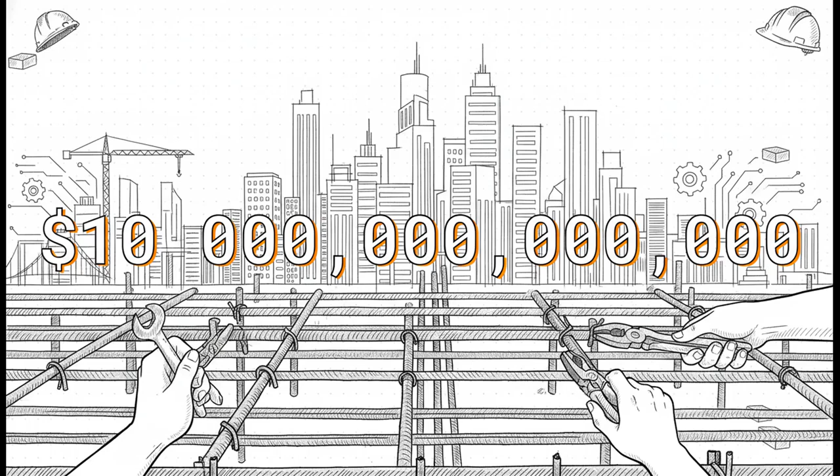$10 trillion. Let that sink in for a second. That is a 10 with 12 zeros right behind it. It's a staggering figure, and it represents the sheer, unbelievable scale of the global construction industry. It's a massive industry. Actually, scratch that. It's quite literally the foundation of our entire global economy.

But, when we look up at those towering skyscrapers or drive down endless highways, how often do we really stop to think about the micro details, the highly skilled hands that actually keep this giant macro economy standing upright? Well, let's dive into this explainer and uncover the highly specific trade that holds our entire built world together.

Today, we're looking way past the shiny glass facades and the smooth concrete walls. We're going to focus on the unsung heroes of this $10 trillion giant, the assistant bar benders and steel fixers. These are the specialized tradespeople manipulating the very steel that reinforces literally everything in modern human life.

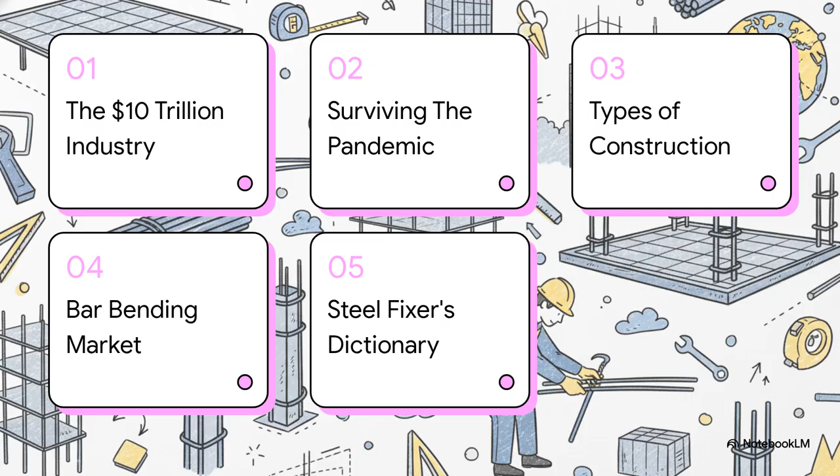All right, here's our roadmap for today. We'll be covering the $10 trillion industry, surviving the global pandemic, 3 types of construction, the bar bending market, and finally, we'll crack open the Steel Fixers Dictionary. Let's jump right in. Section 1, the $10 trillion industry.

So let's set the stakes here. Construction is an absolute heavyweight economic driver. Traditionally, it's a contracting sector, which means this massive global machine is actually made up of millions of smaller businesses and individual tradespeople all working together.

And nowhere on earth is this growth more electric right now than in India. Get this, India's construction market is expected to grow at a compound annual growth rate, or CAGR, of greater than 10% from 2022 to 2027. That is explosive, sustained growth happening right beneath our feet.

But to fuel that kind of relentless expansion, you need way more than just investment capital and raw materials. You need immense human capital. You need skilled hands to actually put the whole shebang together. Which brings us perfectly to this quote. Skilling is building a better India. If we have to move India towards development, then skill development should be our mission.

This really bridges the gap between the crazy economic scale of construction and the absolutely critical importance of individual vocational trades. You just cannot build a $10 trillion industry without prioritizing the folks doing the heavy lifting. And that quote comes directly from Sri Narendra Modi, the Prime Minister of India.

It brilliantly highlights how specialized vocational skills are viewed as the literal foundation of the country's future. It proves that skill development on the ground isn't just some corporate buzzword, it's a fundamental economic imperative for a growing nation. Section 2, Surviving the Global Pandemic.

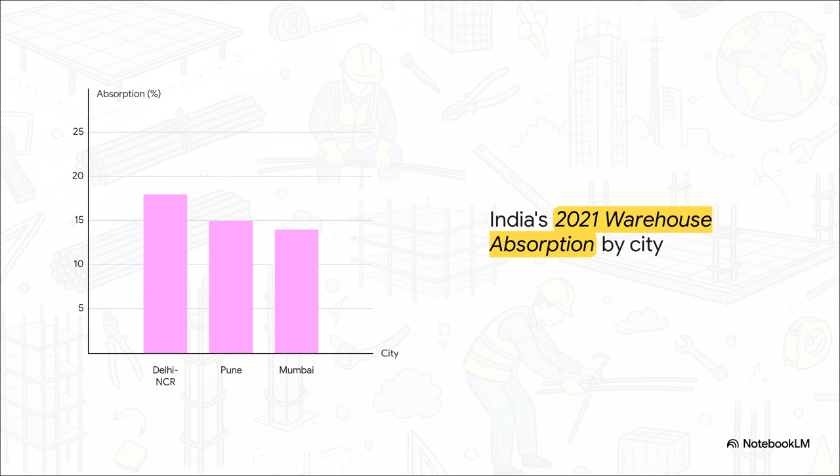So the industry didn't just survive, it rapidly pivoted to build the exact logistics infrastructure we needed to keep all our home deliveries running smoothly. Section 3, 3 types of construction.

Okay, so now that we've got the economics down, let's break this massive industry into 3 digestible categories. It really helps you mentally map the built environment you interact with every single day. First up, building construction. This is the one we all know best, residential and commercial projects. In fact, if you're sitting inside a house or an office building right now watching this explainer, you're literally inside this category. It covers everything from a simple bathroom remodel all the way up to commercial skyscrapers.

And a fun fact, while commercial buildings use complex high-tech strategies, good old-fashioned brick construction is still the most common technique for residential houses in India. Next, we have industrial construction. Now, this is a smaller slice of the overall pie, but it is highly complex.

We're talking petroleum plants, power generation facilities, chemical plants, heavy manufacturing hubs. This sector demands extreme precision and heavy machinery. You've got highly specialized teams of architects, civil engineers, and project managers working in perfect lockstep to make sure everything is both successful and safe.

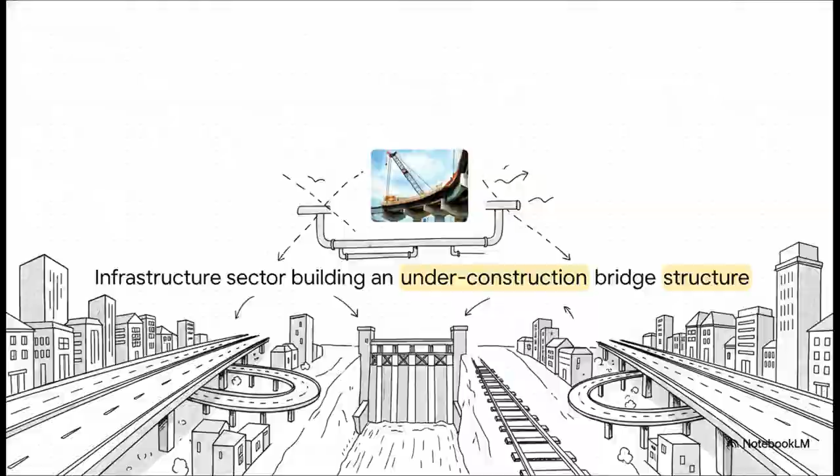Section 4. The bar bending market. So let's see how all of this builds directly to the specific subsector solving construction's biggest headache: concrete's need for strength. See, concrete is amazing at handling compressive weight, pushing down on it. But it is absolutely terrible at handling tension or bending forces. It'll just crack. And that is exactly where steel reinforcement swoops in to save the day. The people who bend and fix that steel are absolutely crucial to every single category we just talked about.

To put the demand in perspective, the global rebar processing equipment market was expected to hit $9.28 billion by 2022, growing at a steady global rate of 5.2%. And over in India, this highly specialized market is expanding incredibly fast to keep up with all the new building and infrastructure development. And you know, a really vital thing to grasp here is that this isn't just brute force manual labor anymore. Not at all. It's a field of continuous innovation.

Today, engineers use CAD software, computer-aided design, to create amazingly precise 3D models of these reinforced structures before a single piece of steel is ever cut on site. This lets them optimize designs and drastically reduce errors. It's this awesome, seamless blend of high-tech digital planning and incredibly skilled manual execution.

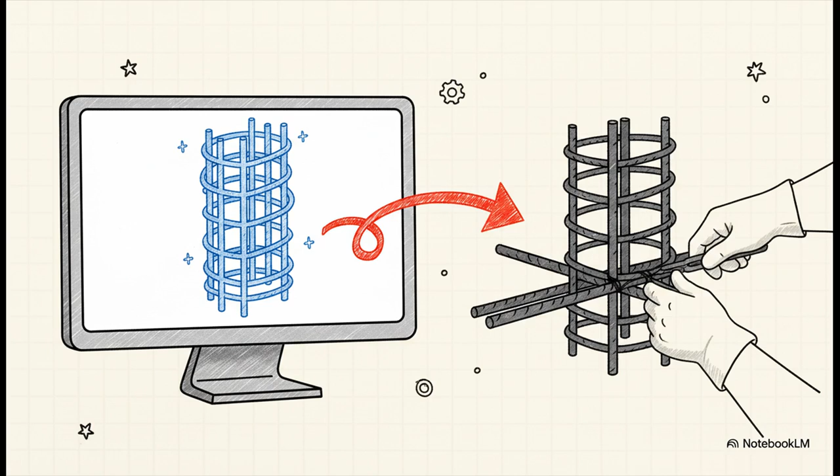Section 5. The Steel Fixer's Dictionary. Let's slow down for just a second here. I want to really ground you in the rapid-fire, everyday vocabulary of this specific trade. Let's learn the actual language spoken by the workers holding our buildings together. First up is rebar. That's short for reinforcing bar. Simply put, it's the steel bar used to reinforce concrete structures. It comes in all sorts of sizes and grades, totally depending on the specific strength needed for that exact spot in the building. It is the foundational ingredient for everything we've looked at today.

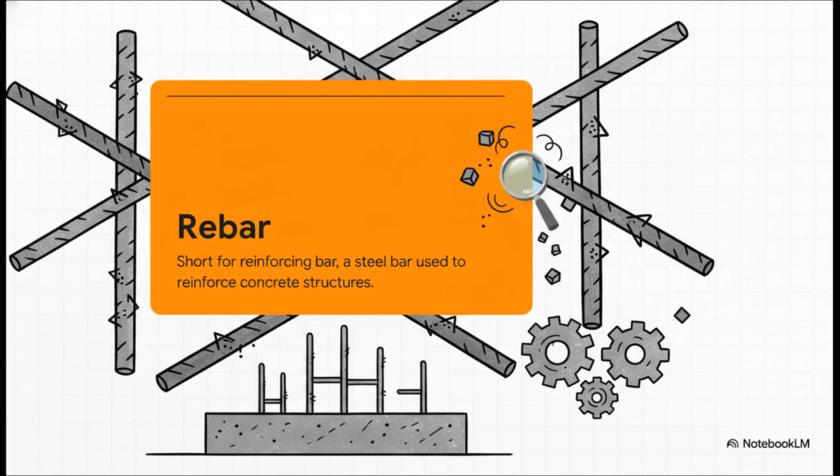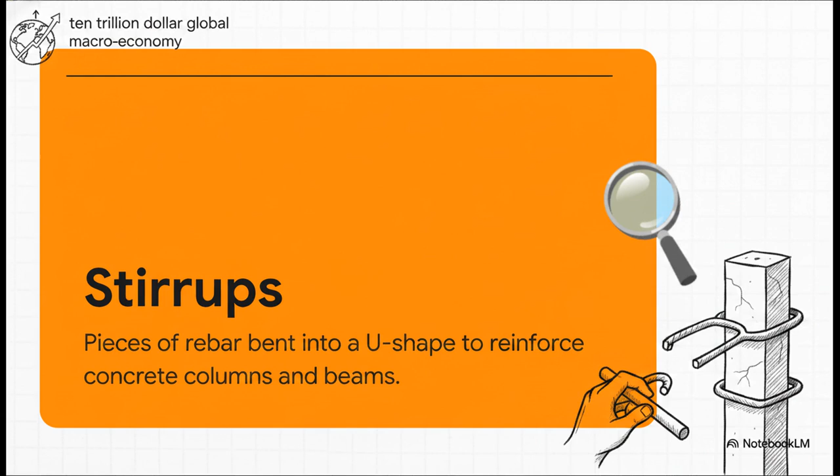Next up, stirrups. These are short pieces of rebar bent into a U-shape, placed at regular intervals along columns or beams. And think about the crazy contrast here. A few minutes ago, we were talking about a $10 trillion macro economy. And right here, we're looking at a micro, hands-on piece of steel bent by a skilled worker that literally stops a massive concrete column from bursting under extreme pressure. Mind-blowing, right?

Then we have lap length. Obviously, steel bars aren't infinitely long, so they have to be joined together. The lap length is the highly specific length of overlap between two pieces of rebar that get tied together to make one continuous line. The precision here is totally non-negotiable. If that lap length is even a little bit too short, the structural integrity of the entire building is compromised. No pressure.

Now, consider bend diameter. This is the minimum diameter around which a piece of rebar can be bent without damaging it or causing microfractures in the steel itself. This perfectly highlights the real science behind the trade. A steel fixer has to use immense force to bend the steel into shape, but they have to respect the physical and chemical limits of the metal to keep its essential strength intact.

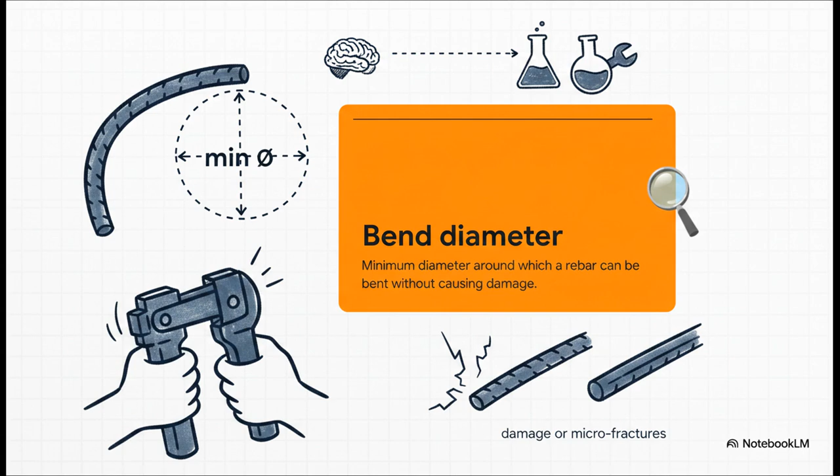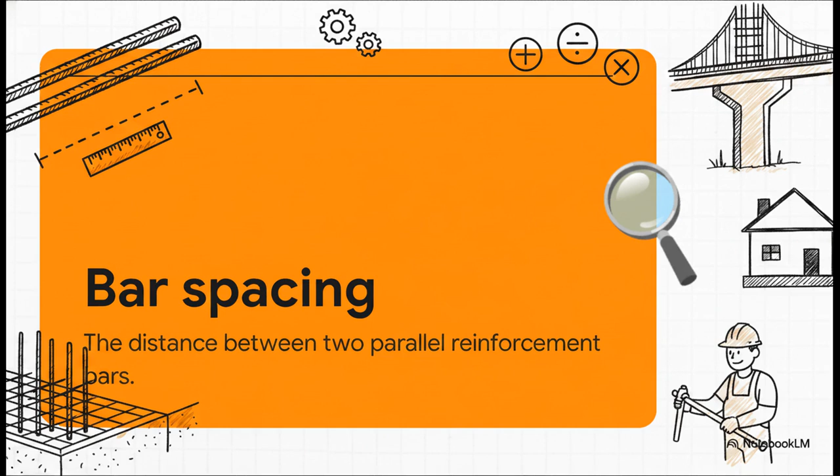And finally, bar spacing. It is exactly what it sounds like, the precise calculated distance between two parallel reinforcement bars. Whether you're pouring a concrete driveway for a house or building the foundation for a massive highway bridge, these millimeter-level details keep the whole thing balanced. The engineers do the math, for sure, but the flawless execution, that's all on the steel fixer.

So I want to leave you with this thought. The next time you cross a massive suspension bridge or ride an elevator up a towering commercial high-rise, try to look past the shiny paint and the glass windows. Ask yourself, whose hands calculated the bend diameter, meticulously tied the stirrups, and perfectly spaced the steel that's keeping you safe right now? Our built world is a total marvel of mathematics and engineering, but it is held together by the very real, highly skilled hands of the bar bender and steel fixer. I hope this explainer has totally changed how you look at the concrete jungle around you.